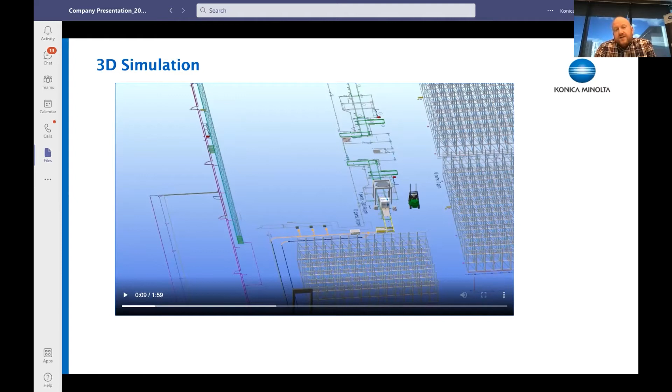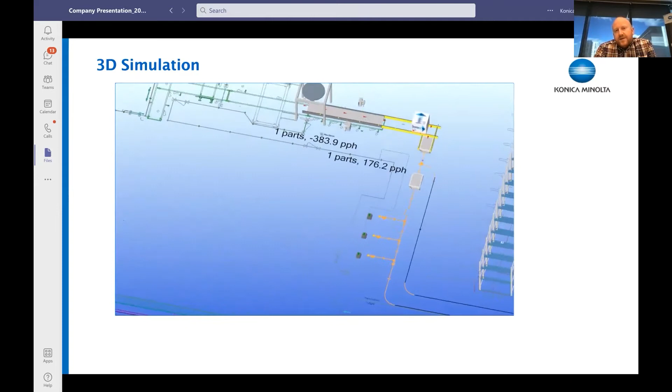What that's doing is readying the pallet to be picked up by the AMRs. This physical integration is essentially an extension of the conveyor, but one that enables the AMR to actually lift up and pick up the pallet. It then drives away, turns around, and completes what we call a mission.

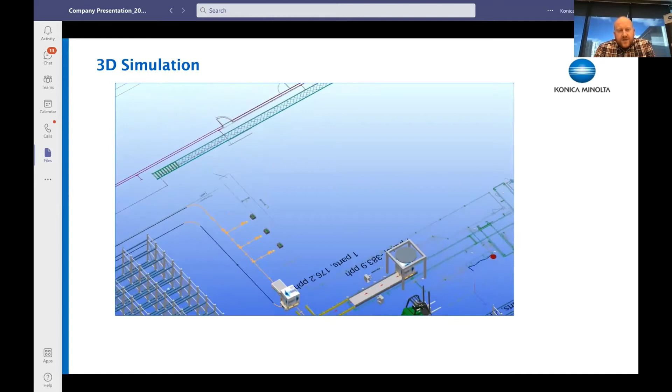This particular solution that's being rolled out as we speak essentially delivers around 60 pallets per hour from a position within a warehouse to a staging area. This is just one example of the type of solution we're able to do, and it's a good example of both the digital and physical integrations that Konica Minolta is able to provide its customers here in the Australian market.

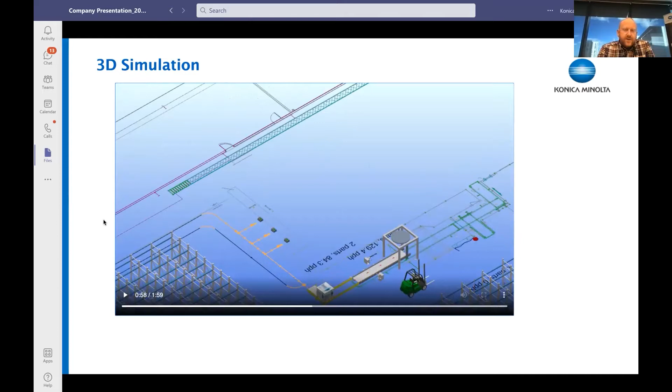A very brief introduction into MiR, both as a company, but also mainly as a technology. There's a couple of questions we would like to cover here, especially on the differences of the AMR and the AGV, as quite often this is the topic that's being raised among our FMCG customers. So we'll try to cover that at a high level and explain how the technology works.

We have also prepared a live demonstration of our newest innovation, which has been developed and launched really with FMCG in mind. We worked a lot with our customers to get the right feedback - what makes the robot fit for purpose in FMCG? We are happy to launch a couple of new robots, and we will demo them in front of you today to see the newest features and key value proposition of those robots.

Then we will move into the applications where MiR creates value in FMCG. What I've chosen today is to focus really on the biggest, most often applications that we see in this space. I think in general the applications are quite numerous for how you can deploy AMR in FMCG, but we will really focus on those that the majority of customers focus on, because that really creates the value, the scale, and the right ROI.

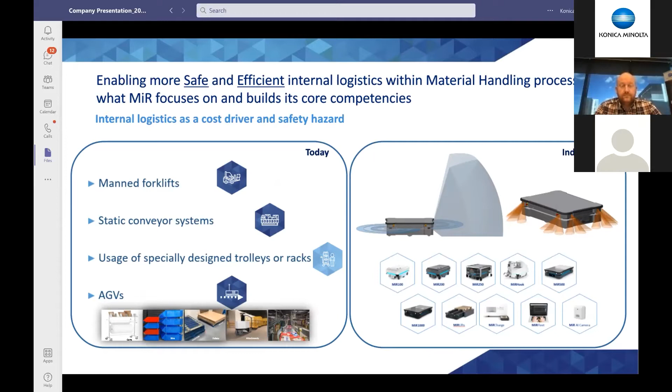So what is MiR focusing on? I think it's pretty straightforward. Our key competency is looking at internal logistics, enabling really safe and efficient material handling processes in different industries, FMCG included. Anything that moves today, or is being moved by forklifts, conveyors or AGVs, we believe - and our customers already see - that in the future AMRs could be really creating value in that space. So anything in the space of material handling, we see our core competency to really drive innovation.

For AMR, the key points I want to call out today: first of all, it is a nimble and pretty agile technology, which gives a very different level of penetration. One of our customers within FMCG, to quote them, said that this technology gives the penetration to go far into production to automate something which has been deemed impossible before.

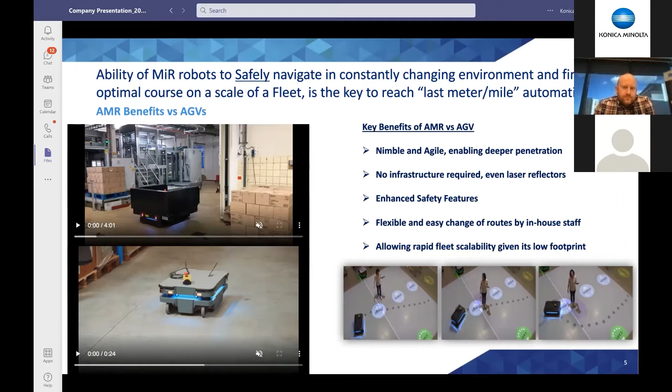This technology does not require infrastructure. Even laser reflectors - for those who have AGVs in your facility today, you know you still need some sort of corridors or infrastructure to navigate that technology. With AMRs, you don't need to. Our technology has the capability itself to move around your facility, create a digital map, and then you can afterwards define where the technology can navigate.

It has enhanced safety features. It's clearly what we do - safety is paramount for us, exactly for the reason that we see this technology as collaborative. It has to work alongside people, so safety alongside efficiency is key for us.

Ease of use is also key. The flexibility and ease of changing routes in-house by employees is crucial for us, because we see that this technology will need to be eventually managed by the people on site. As part of the deployment of our projects, we work with our end users to bring them up to speed and give them the tools to easily change missions or maps for the fleet of robots.

We see that the environment changes in FMCG - there's a need to either deploy new lines or change the layout. That should make it easy for our customers to use our technology rather than bringing someone from outside, or consultants, to do that for them. So again, there is ease of use and cost saving here.

And the last point, very in line with the first - because it is nimble and agile, you have an opportunity to add scale to your fleet. We see today fleets in FMCG of more than 20 robots on one production floor doing missions. You'll see in some of the use cases ahead of us how this allows you to automate multiple points in your facility, given the scale. And we know when we talk FMCG, scale is what you're looking for - if there is no scale, it's not interesting.

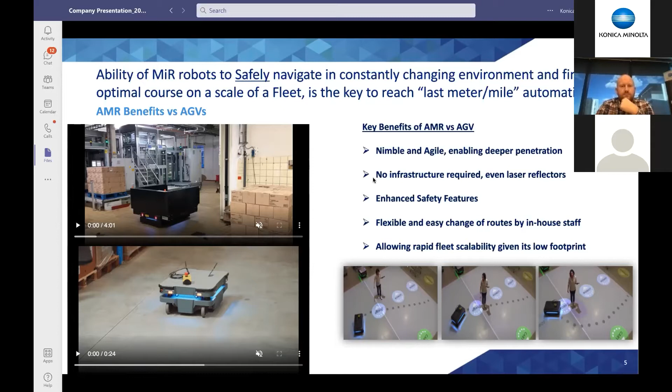Very briefly - for those who want more, we can connect on a separate call - but in terms of how it navigates today: our technology does not require any infrastructure, because we use all the sensors we have, either scanners, 3D cameras, or proximity sensors, to take inputs from the environment around the robot, place itself on the map the robot has created, and figure out how to get the best optimal route from mission A to mission B.

The way our robots work with your facility, we use what we call a global map - that's the map where we know the full layout of the facility, where we're allowed to drive, where we're not, where there are restricted areas, or where there's potentially mixed traffic because of other technology like forklifts or AGVs. Using that data, our robot will then use what we call a local map - as it progresses through the mission in your facility, if someone steps in front of it, or someone has left a pallet in its path, the robot will use the local map to find the optimal route.

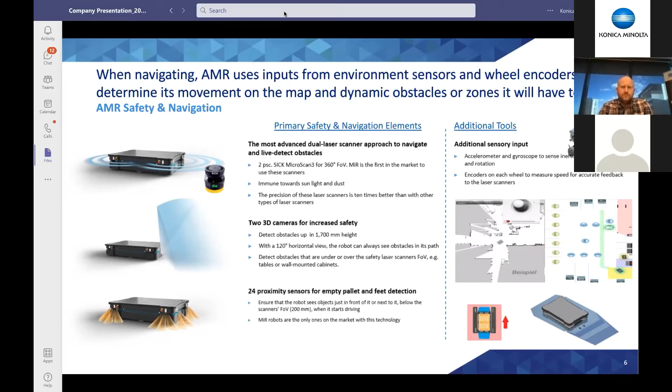On this slide, we have prepared a small demonstration. Here you will see a demo of our newest robot. Hi, I'm Dana, and I'm in the showroom at MiR headquarters.

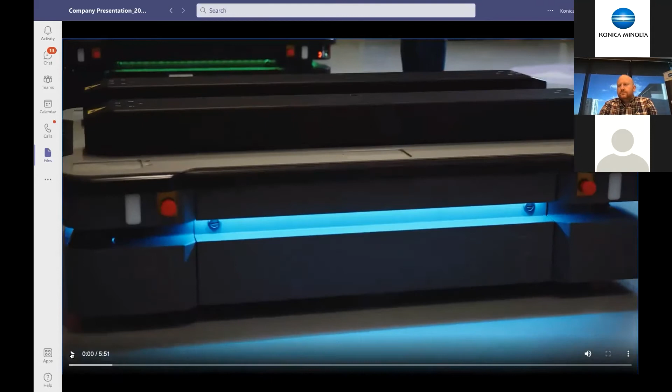I would like to introduce our new large platform robots, the MiR 600 and the MiR 1350. They are capable of heavy-duty lifting of up to 600 kilograms and 1,350 kilograms of payload, ready to automate your internal logistics.

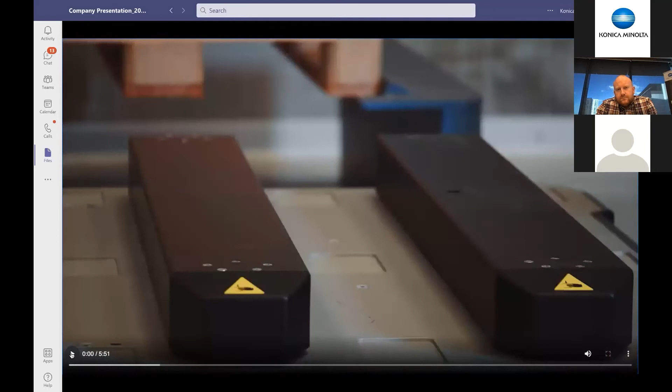This MiR 600 is equipped with our EU Lift top module, which enables the robot to pick up and place EU-sized pallets. Right now, the robot is getting in position to dock to the pallet rack, using laser scanners for precise positioning.

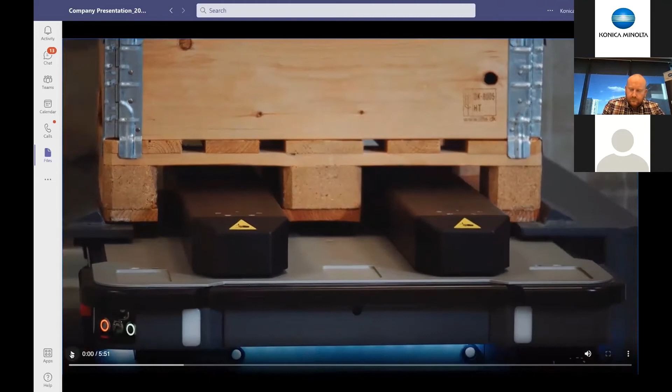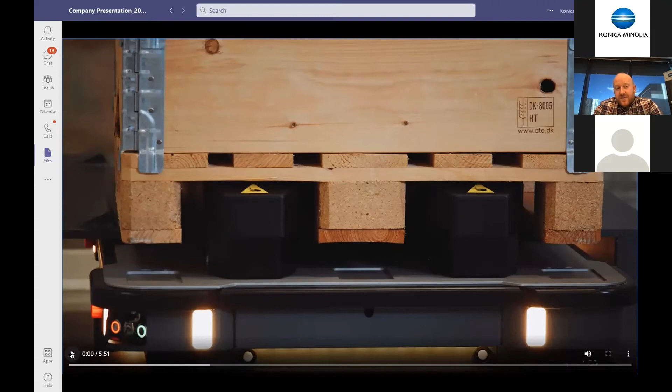The robot will drive into the pallet rack, and the lift will push up into the EU-sized pallet to pick it up. We can also pick up Australian-sized pallets, such as 1165 by 1165 or CHEP pallets, using a different top module.

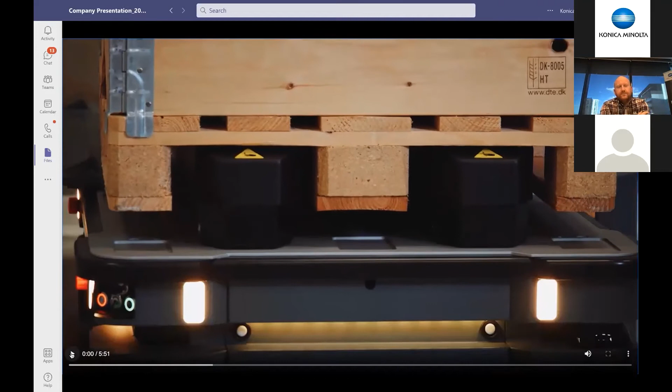The robot undocks from the pallet rack with the pallet in place. Next, the lifters will lower it for safe positioning on top of the robot, and the robot will drive away to place the pallet in the desired location in the facility.

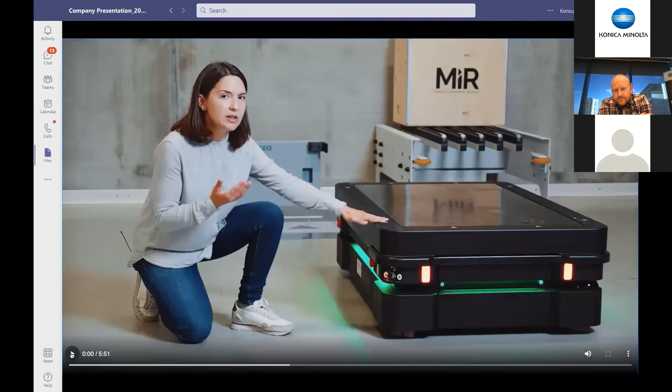Now I'd like to talk about the MiR 1350 pallet lift top module. This top module enables the robot to pick up and place US-sized pallets and a variety of other sized pallets. This design is very similar to our shelf lift top module, which enables the robot to pick up and place shelves that carry a payload.

And now I'd like to hand it over to Charles, who's going to tell you more about the hardware for the MiR 600 and MiR 1350. Thank you very much, Dana.

I'm standing here in front of the 1350. Both the MiR 600 and the 1350 are based on the same robust platform and offer the same functionalities. The MiR 600 can drive 2 meters per second and the 1350 can drive 1.2 meters per second.

It is the first AMR that has an IP rating of 52, due to improved protection against dust and water droplets. That means we can drive in more environments.

We have improved the framing and the bogie of the robot to be able to withstand the higher payload. Here in the front, we have changed the orientation of the cameras to improve and reduce blind spots.

Now I'm going to open the front compartment to show you how it looks. We have rearranged the components to make it easier to service. All the components are mounted in a way that makes them easy to take out if needed.

We have used the same battery as we did in the MiR 250. It is easily accessible through 2 buttons.

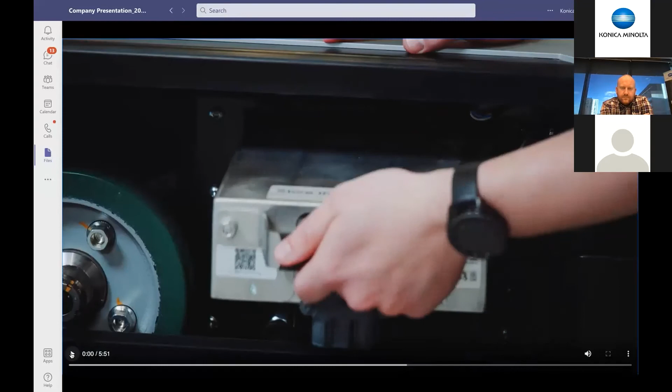We have moved the battery compartments to the side of the robots instead. That means we can easily swap the batteries to make the robot run 24/7 with minimum downtime.

The battery connector has 3 options. Option 1 is where I'm at now, where I can remove the battery. Option 2 locks the battery in place for transportation. Option 3 locks the battery in and connects it. Now I can turn on the robot.

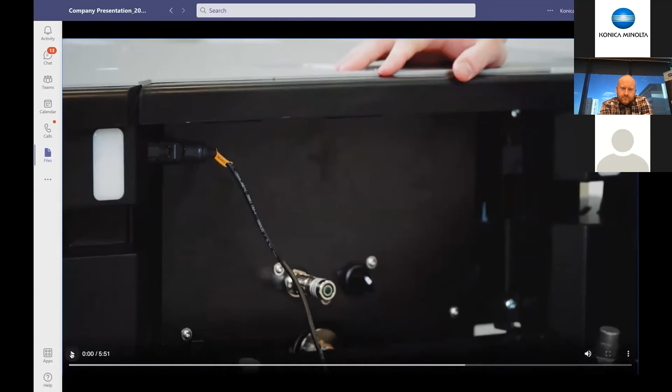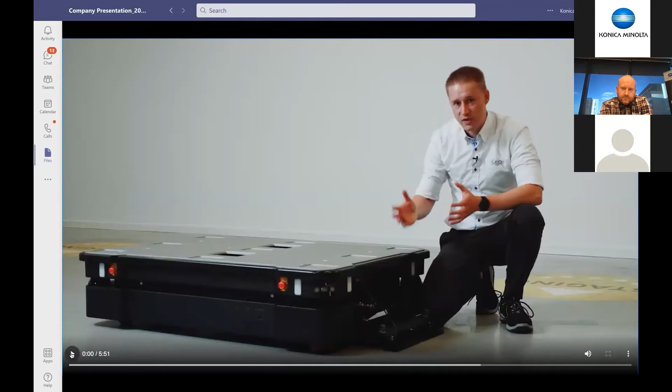Here in the back, we can open it in the same way as on the side, using these 2 buttons. In here, we have the brake release switch that enables the robot to move. Inside this black box, we have sealed away the carrier board and the motor controller due to the IP rating, so it's better protected from dust and water droplets.

Now I'm going to hand it back to you, Dana, for the safety demonstration. I'm in the center of the showroom now, and what you see on the ground is a projected view of the robot map. I'll use this a little later to talk about navigation by the robot, but first I'd like to talk about safety on the MiR 600 and 1350. These robots are heavy-duty robots designed to transport heavy payloads.

For this reason, it's crucial that they operate safely in an environment, especially around people. They have been designed to comply with the safety standard ISO 3691-4 that is applicable for AMRs.

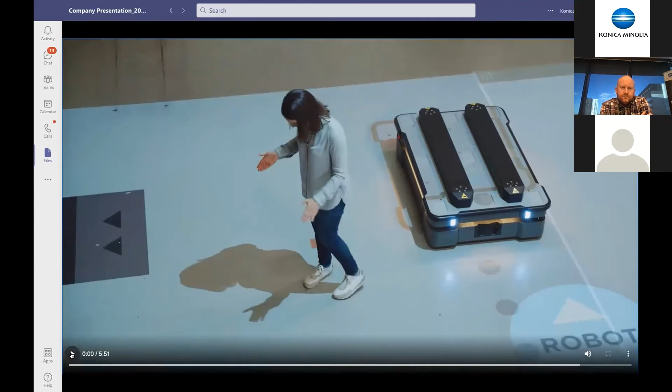The robot uses a robot map to navigate safely in its environment. Laser scanners on the robot identify and detect obstacles in the environment. You can see under my feet, red dots indicating live laser scanner data. This means the robot has identified me as a dynamic obstacle in its environment.

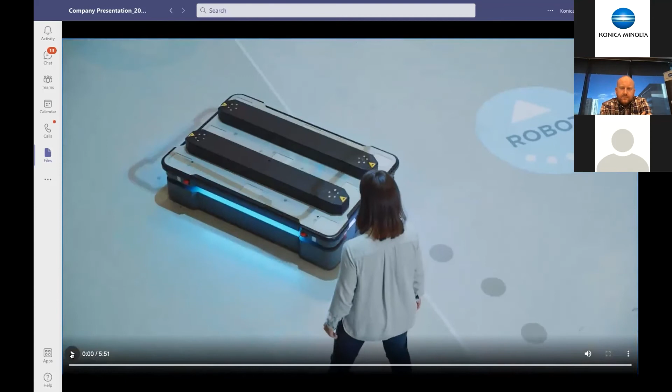Now I'd like to demonstrate the collision avoidance safety function, which says that if I step into the path of the robot, it will plan a new path safely around me so as to avoid colliding with me. Right now on the ground, you see the planned path indicated by these dots for the robot. If I step into its planned path as an obstacle, you can see the robot plan a new path around me. This new path ensured the robot did not collide with me.

And that concludes our presentation. I hope you enjoyed learning about the MiR 600 and 1350.

So we hope you enjoyed the presentation of our newest robot. As mentioned, what is really key about this comparing to the earlier versions of MiR 500, MiR 1000, which has been successfully on the market for quite some time. In the conversations with the FMCG, we understand, and you will see in a moment as well, the pallet movement is one of the largest applications that we have in the FMCG space.

And that, of course, has raised a couple of questions. First of all, compliance with safety. We understand how safety is important in FMCG. So with the introduction of the newest ISO standard 3691-4, which applies to AMRs and has been called out as key among FMCG players globally, both in Europe and US, these robots have been made compliant with that.

On top of that, as you probably have noticed during the demonstration, these are unique robots which are now IP52 with a safety and protection rating. What that means is, as we go into the production space to transport packaging material, or transport finished goods in the warehouse, there is a possibility that small dust particles will continuously accumulate in the robots, which first of all has an impact on robot performance, but also could lead to the risk of those particles, due to overheating, turning into fire.

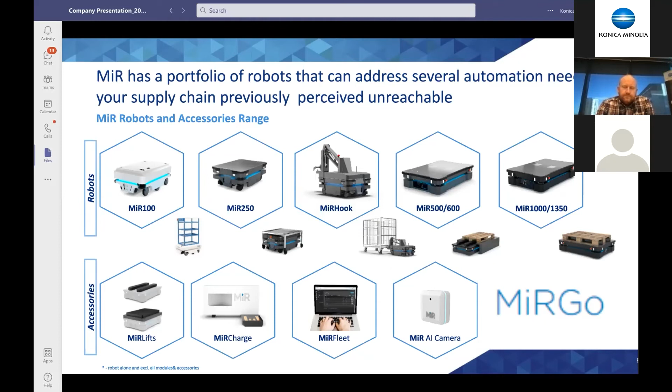So let's move to what this actually means and why it's relevant for FMCG. If we look today at FMCG, let's take a step back: what are the complexity drivers in your business today? Clearly new brands, new channels, retailers, e-commerce, and sustainability topics are now dominating this space. What that all means is that you're producing more and more SKUs in your facility.

This drives complexity and downtime on your production line, because every time you switch from one SKU to another, you need to bring new components and packaging that differentiate one product from another. That material flow has been extremely challenging to automate in FMCG, driven by two factors: first, very limited, constrained space, because production lines have been packed over time to get the most out of facilities; and second, you still have a lot of people operators. Bringing automation or AGVs into that space hasn't been feasible, because there isn't enough space, and frankly there are people there which doesn't allow you to do that.

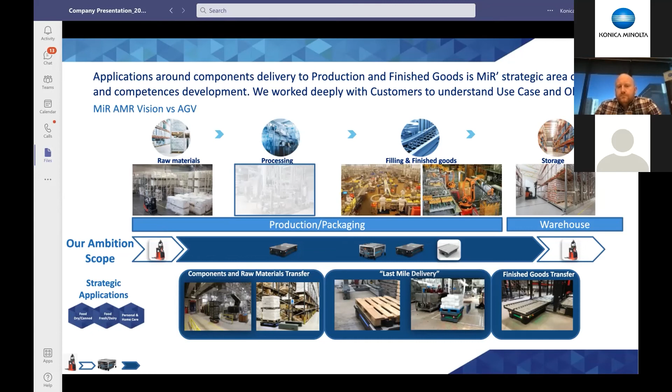What we have also seen is that because there's been increasing demand from FMCG players for end-of-line palletizing, we now see manufacturers of high-speed palletizing stations deploying their new stations with AMRs from the onset of installation. So for those interested, you can follow some of the innovations here in Europe - at Fachpack later this month we will be launching, together with the CSI Palletising, an end-to-end solution of the end-of-line palletizer and AMR. So these are clearly the two use cases I would like to call out today.

Martin, can we see what's on the next slide?

This is what we try to visualize with our conceptual video, how AMRs can address components automation on the left side. You can see we're taking components from your packaging material warehouse and bringing them into production, or potentially taking over from what some of you call a supermarket area or intermediate warehouse, a storage space where you store different components, where robots come in, take over those components and bring them to the production line or packing line.

On the right side, as I mentioned, we talk about end-of-line palletizers, which is increasingly growing, and I think we will see more and more of that deployment coming up. There's a number of other applications you can find today in FMCG which we didn't prepare material on because these are not yet at scale.

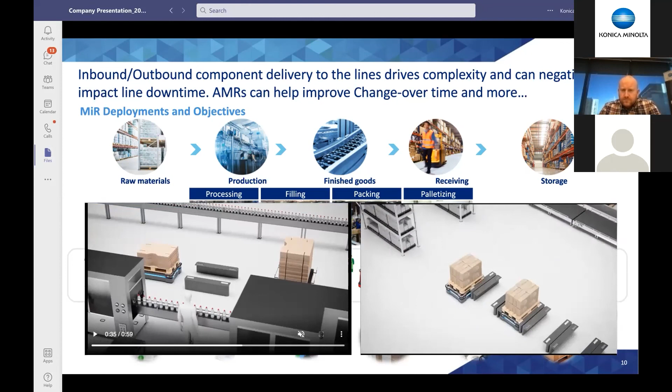But to call out a couple of others, we see our robots today helping with empty pallet removal, discarded materials or packaging, so waste movement. What we've also seen, which has been a very interesting use case, is quality samples handling.

In FMCG, as you probably know, traceability is key for your product. Every production run, you need to take out some samples from your production. Today those would be removed by operators and taken to storage. What we've seen is either with the deployment of a MiR AMR, a UR robot on top of that, there are use cases where those samples are taken straight from the running line, or simply MiR is used to shuttle those samples from the line to the storage area.

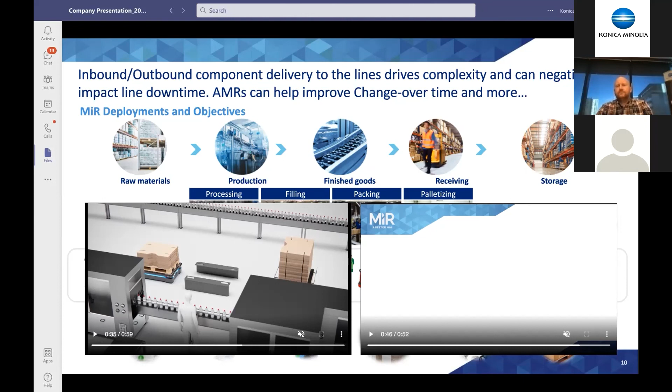So clearly, I think the use cases are more about your imagination and where you have opportunities today. Of course, the business case, which we understand, needs to be lived up to, and that is what we focus on and see a lot of use cases on. Next slide.

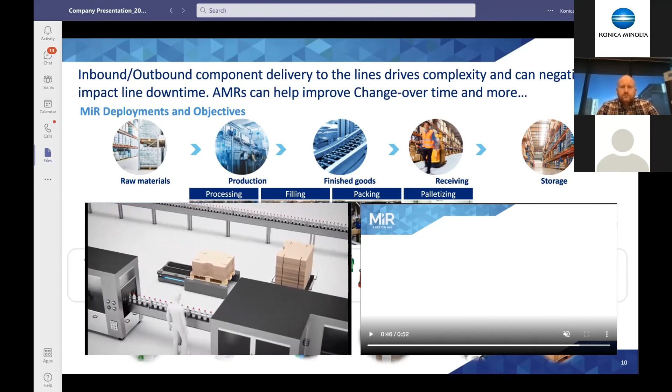Just to recap on how we organize around our customers: MiR is a manufacturer of the hardware, and the way we bring the technology to market is through our valuable partnerships with distributors in the markets. We do work closely with our distributor partners on developing the integrator network, who is becoming quite key in successful implementation and deployment.

As Martin mentioned, if we think of the use cases either in the production or packing hall, or end of line, connecting into the higher systems of MES or WMS to really make that workflow digitalized, we need to connect that fleet into the system. We need capable partners who understand your flow, who understand your system, and who you're comfortable taking on that project with, knowing that it's going to happen. That is key in FMCG, I must say.

Only a few projects we see today where, probably in year one of implementation, missions will be handled manually, with a person operator using the HMI calling or assigning the mission to the robots. But always as part of that roadmap, a year or two onwards, connection into the higher system is already part of the business case.